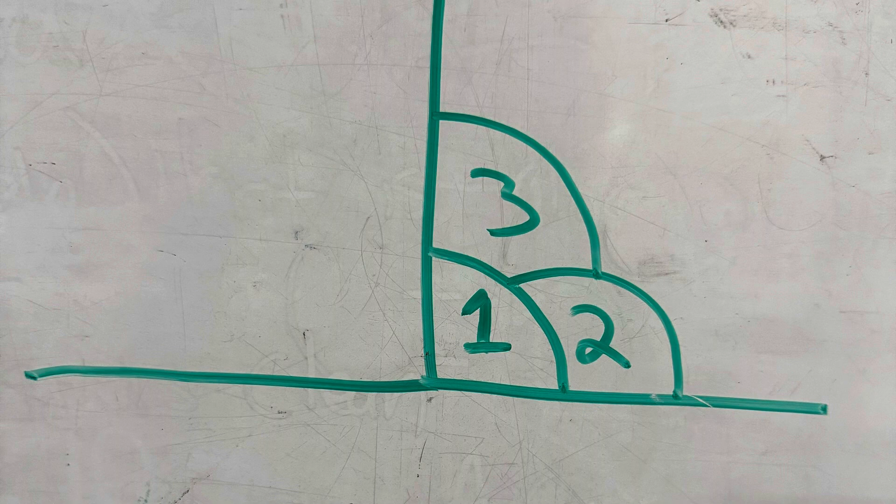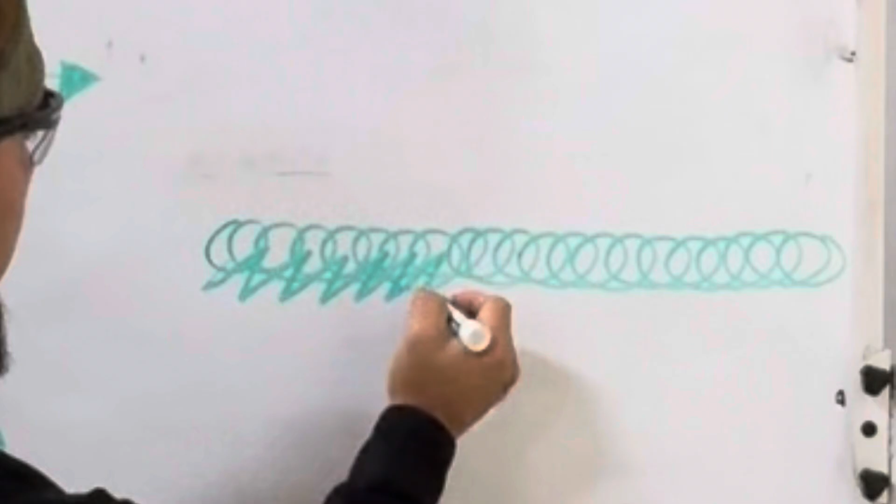Three different techniques that I use: sideways zigzags, circles, and step pause, help me with my overlapping welds and staying more consistent. When using these techniques, there are certain things we have to be looking for and paying attention to. For example, where am I aiming that wire at whenever I go to my top plate, bottom plate? You want to stay consistent wherever you point that wire.

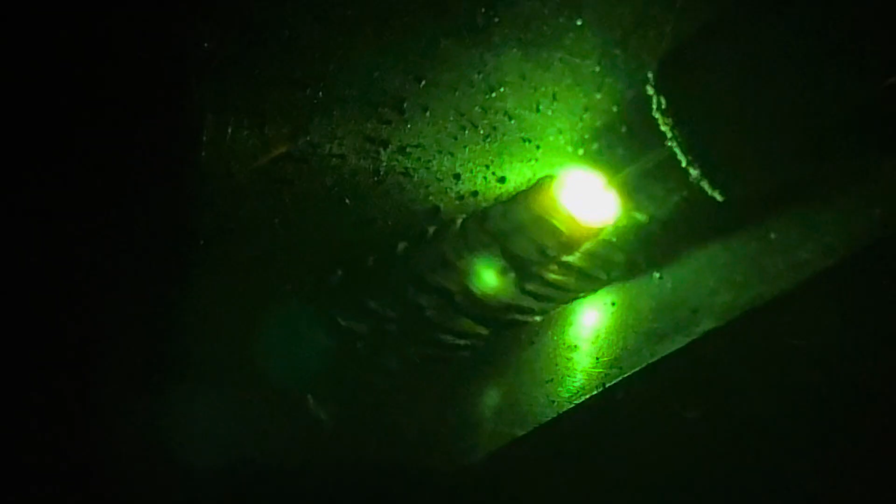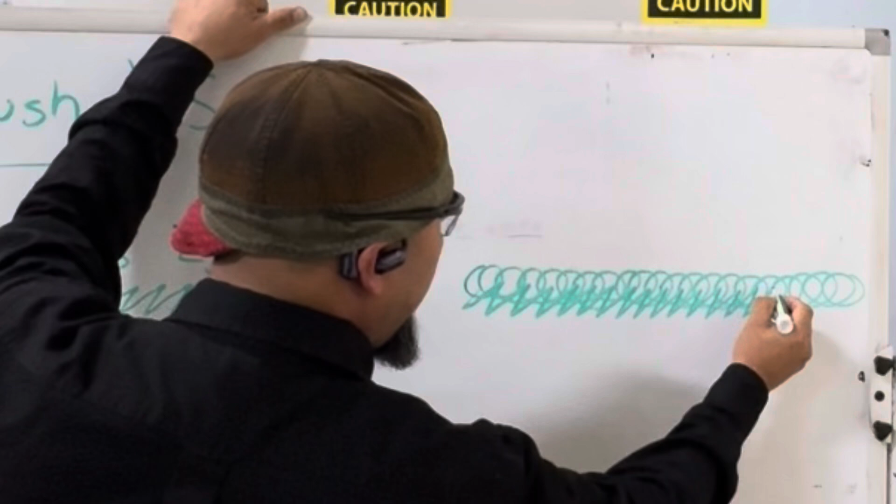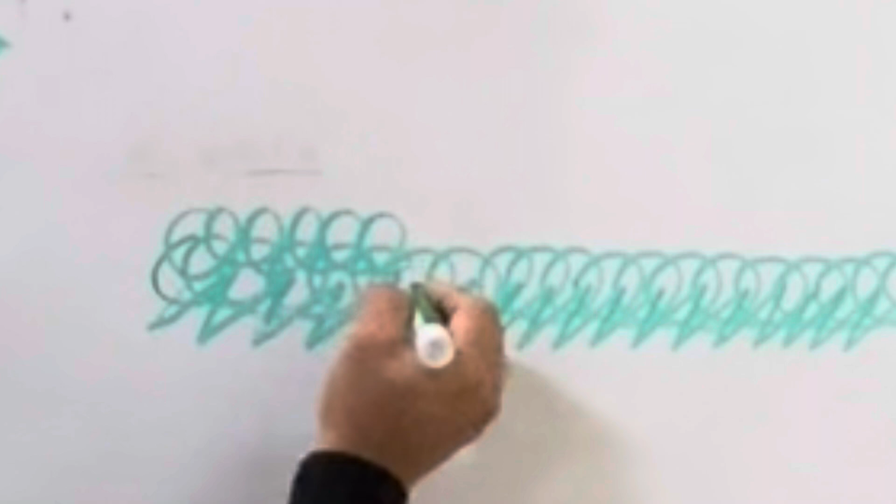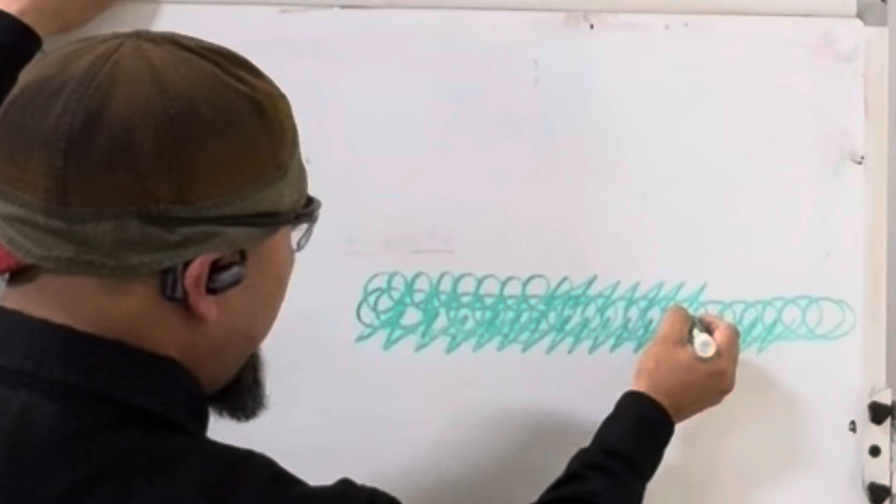We always want to use the edges of our weld. In this example, I'm drawing up to the center of the weld and then going past that bottom edge, always trying to maintain that edge in the center of my puddle, whether it's this up and down or circle technique. I'm going to the same spots every time, above that top edge and the center of my weld. I can transition from different techniques to another, but I always want to maintain those same aiming points, using that bottom edge or top edge to stay in the center of my puddle.

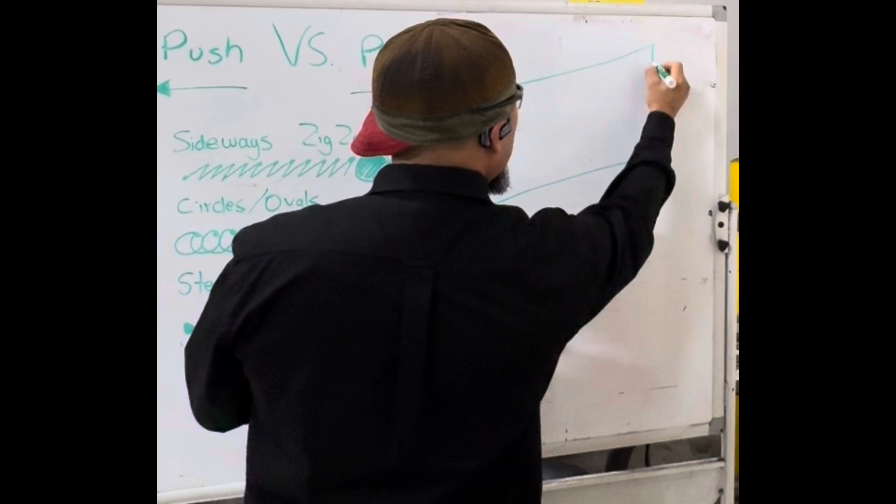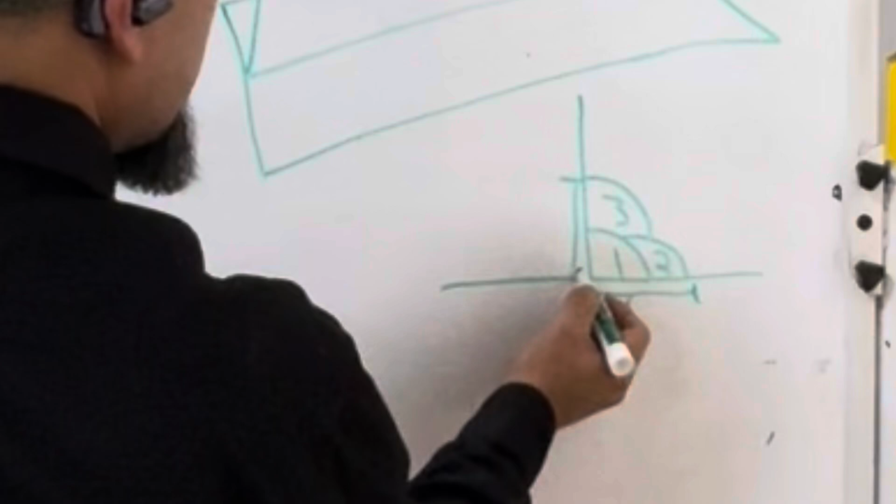When it comes to overlapping, you have to know what technique you're going to start with from that first weld. If you need to change up your techniques, do so, but at the end of it, you want your legs to be the same length on both top and bottom.

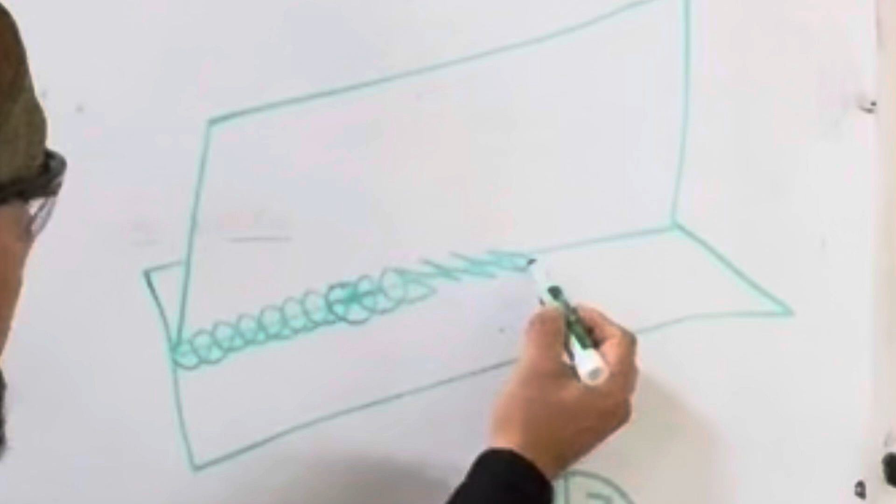Using the circle technique, I want to use that edge where both of my plates meet as a guideline, and keep it in the center of my puddle. I can easily transition from circles to sideways zigzags, or move in either direction. At the end of it, I want to keep that edge as a guideline and maintain it in the center of my puddle.

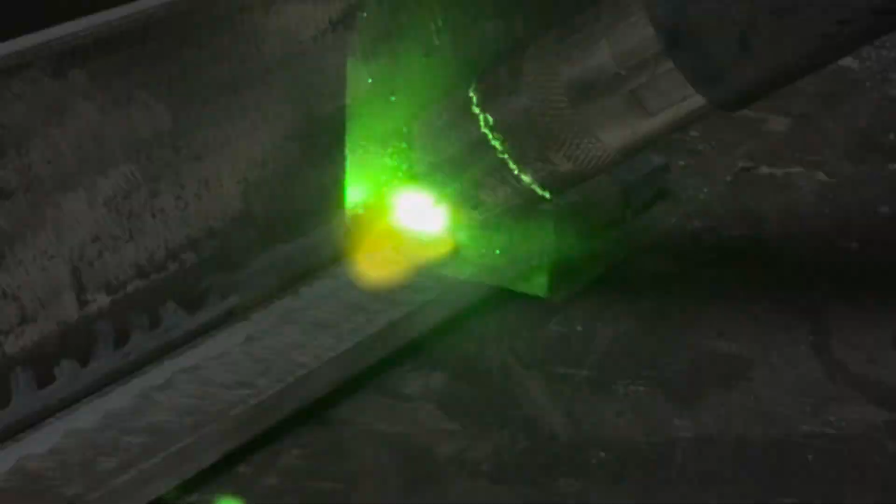This would be the pull method view. This would be the push method view.

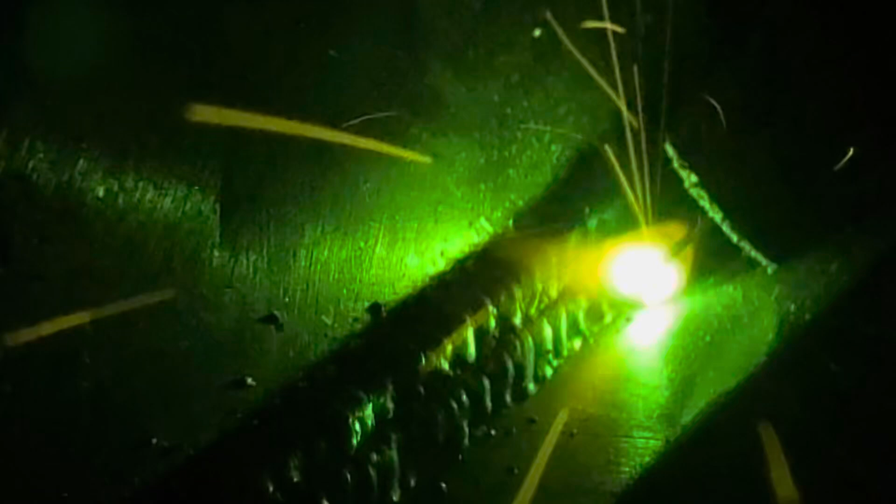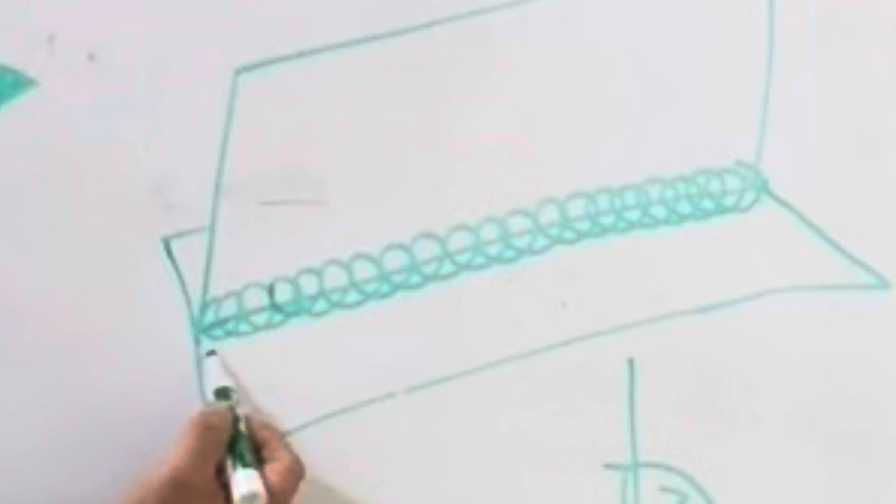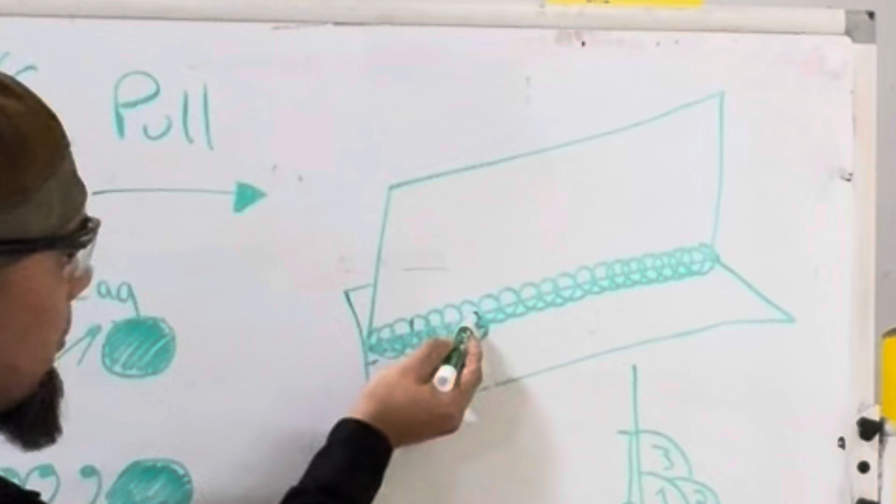Now that we have our first weld established, we're going to use the edges of that weld to keep us straight. Right here, I'm using the center of the weld and the bottom edge of that weld as guidelines. I'm going to point my wire to the center of the weld and then go past that bottom edge using a circle technique or sideways zigzag, as long as I maintain that bottom edge in the center of my puddle.

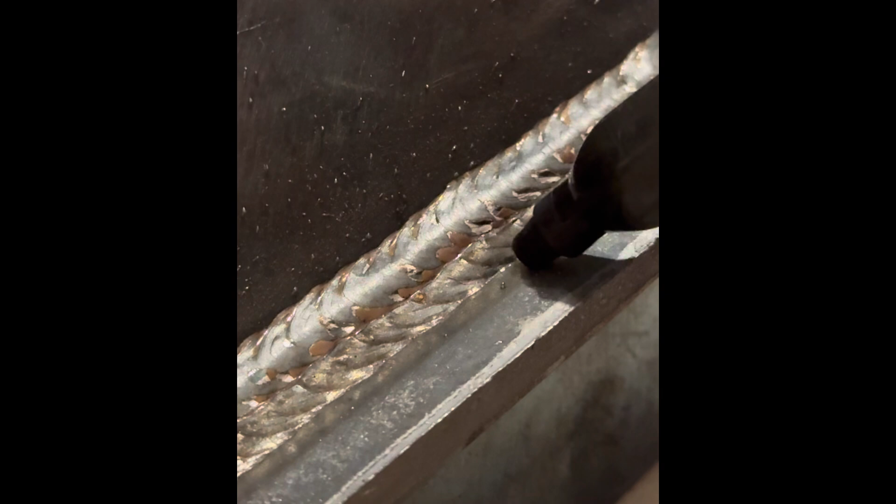You always want to stay a step ahead by having an aiming point, so you know exactly where you're going to be aiming that wire at, always using those edges as a guideline.

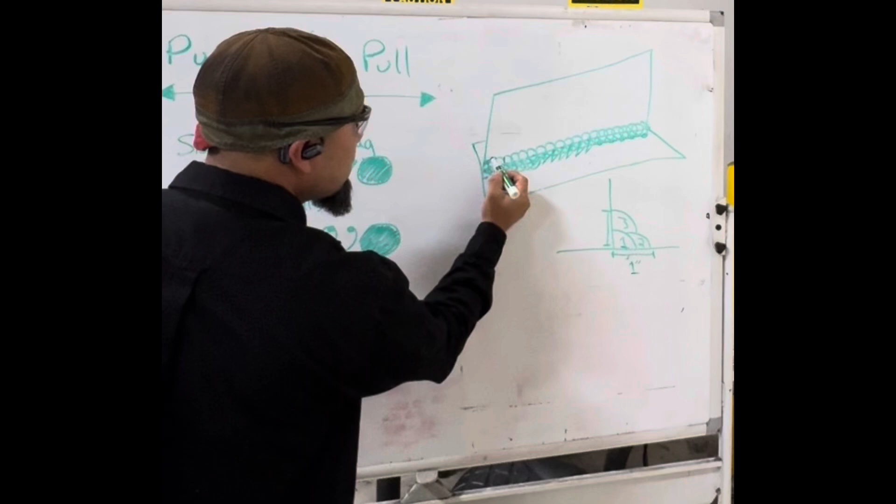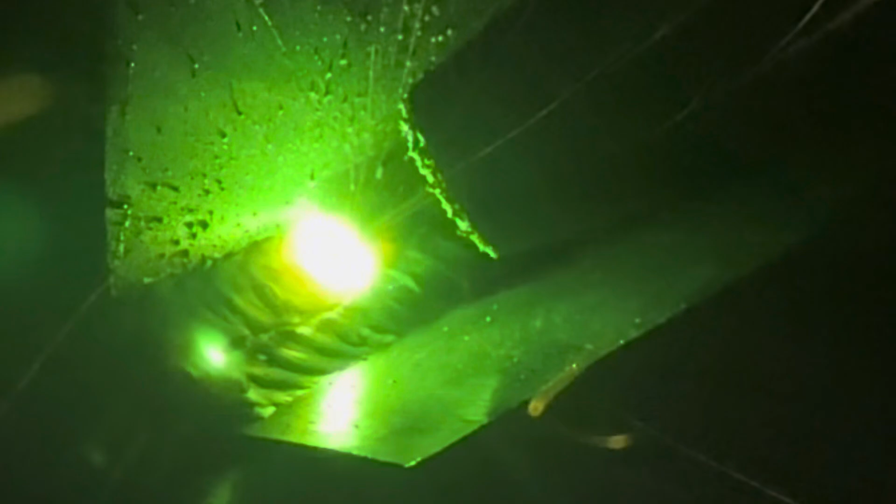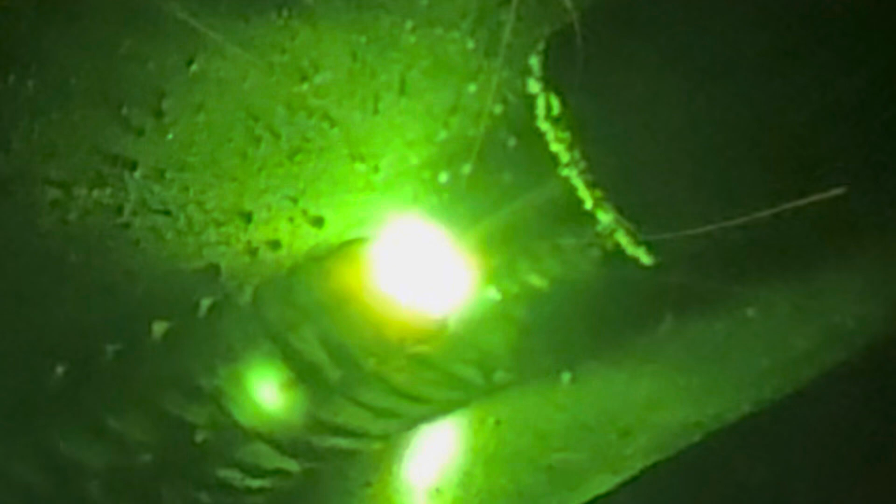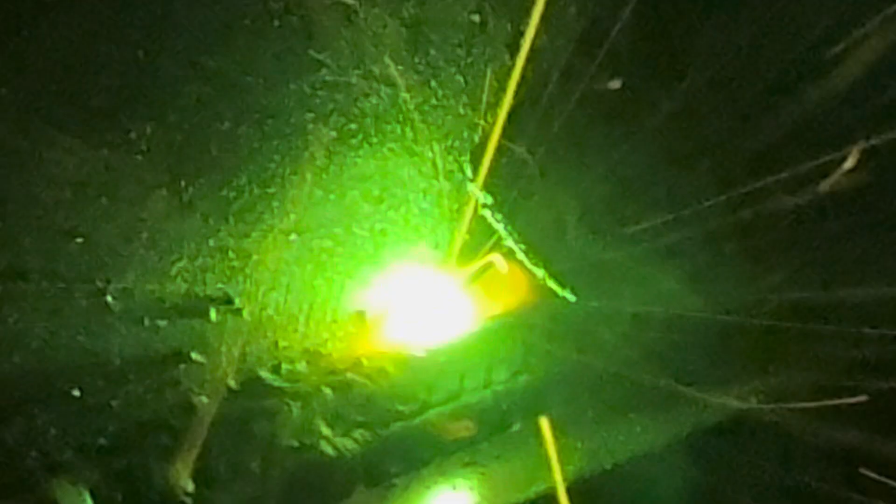On this third pass, a lot of people have trouble with underfill because after that second pass, we end up creating a valley. So with whichever technique we're using, we have to slow down to fill up that valley and pay closer attention to our puddle. Once we see the top of that puddle hit the top plate and the bottom of our puddle hit the top edge of our bottom weld, we know that valley's filled up, and that's what gives us our speed. In most welds, you'll have to transition from one technique to another to properly overlap those welds or fill up those valleys. But at the end, you have to learn to read that puddle so we can better control our speed.

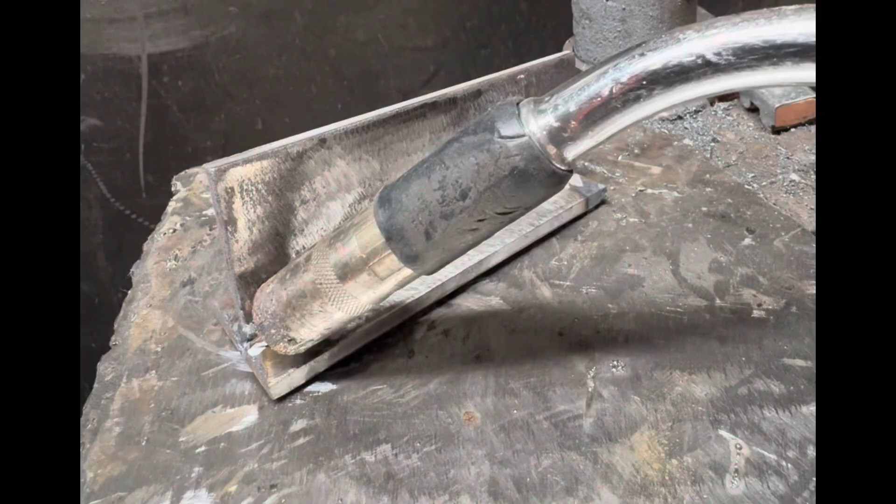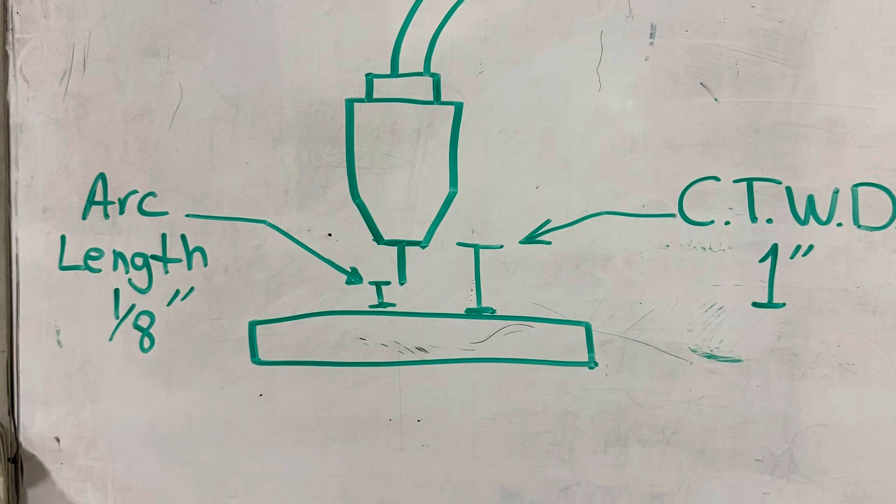Using the pull method does give you deeper penetration and a stronger weld overall, but visibility-wise, the nozzle gets in the way of our line of sight. So we have to use that contact-to-work distance to our advantage so we can look through the wire as we're doing our techniques. This is a great example of looking through the wire and using your contact-to-work distance, which gives you about an inch to pull that gun back, that nozzle back, and look through that wire so you can keep an eye on that edge.

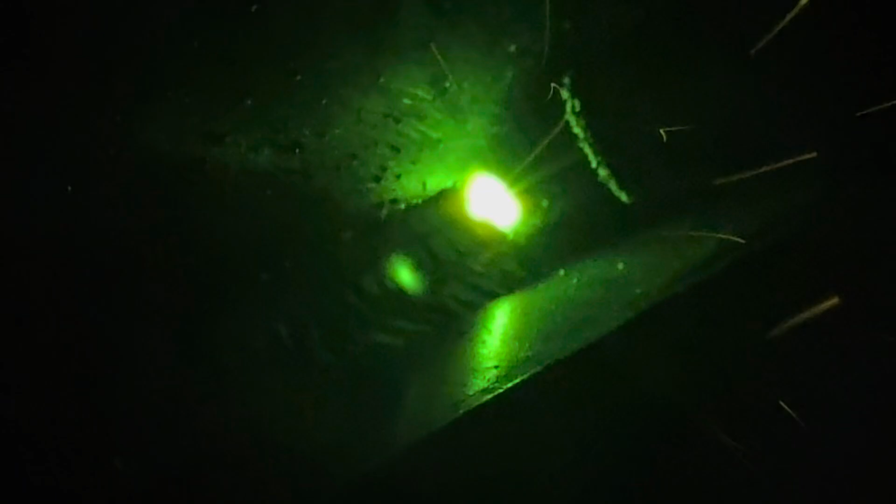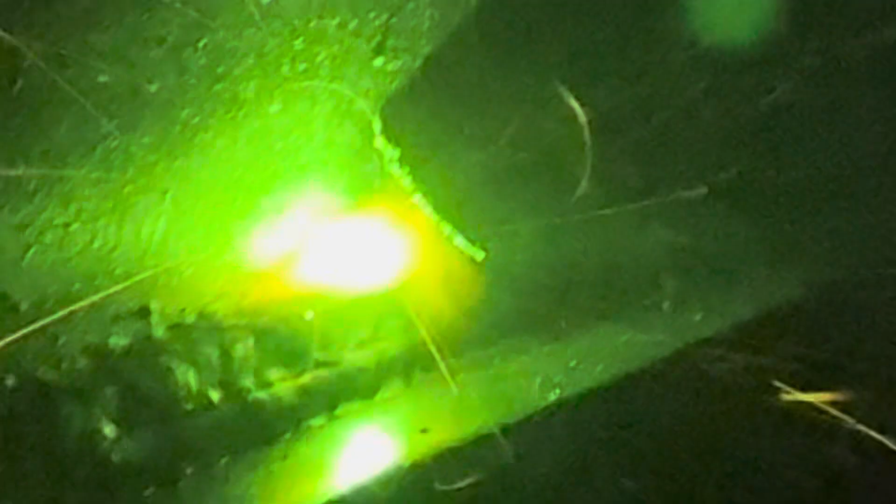Using the push technique, you do get less penetration. It's still a strong weld, but it's the weaker of the two. Visibility-wise, you get a lot more visibility of the wire and overall much better control of your technique. So if I had to pick one, I would pick the push method because it gives me a better line of sight. I can see my puddle a lot clearer, manipulate my puddle a lot better, control my technique a lot better, and have a closer contact-to-work distance, which allows me to shield my weld a lot better.

Versus using the pull method, now I really have to use that contact-to-work distance, pull that nozzle back about an inch or so, so I can look through that wire to keep my weld straight and consistent. But I have to keep in mind, if I pull it away too far, I'm going to lose that gas coverage, which could result in porosity, or the wire losing its connection to the workpiece, which causes it to kick back at you and spatter a lot more.